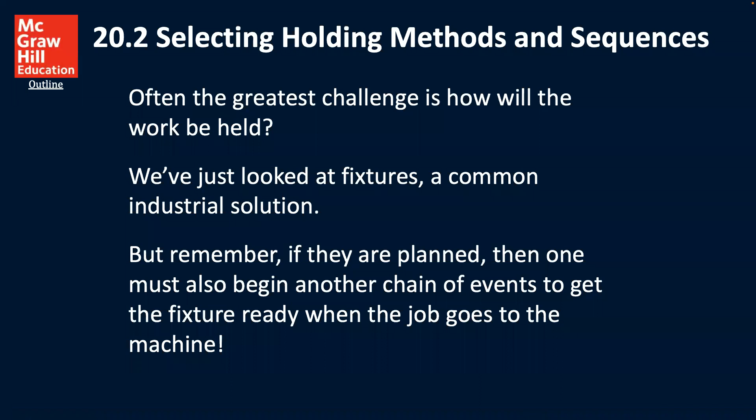Okay, continuing on, let's talk about selecting holding methods and sequences. Often the greatest challenge is how will the work be held? We just looked at fixtures, a common industrial solution, but remember, if they are planned, then one must also begin another chain of events to get the fixture ready when the job goes to the machine.

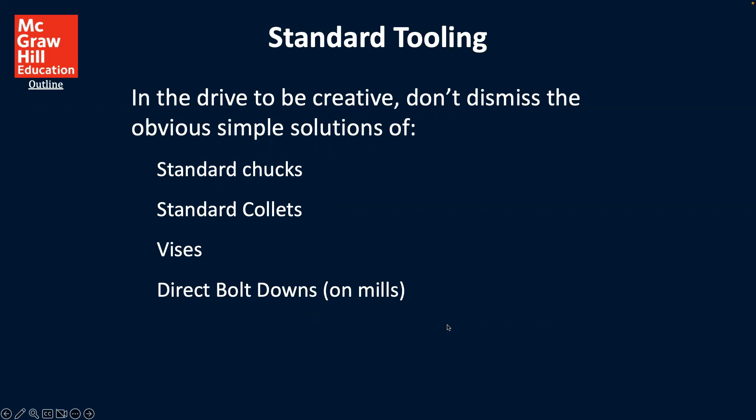So for standard tooling, in the drive to be creative, don't dismiss the obvious simple solutions of standard chucks, standard collets, vises, direct bolt downs on mills. These are all possible ways that you can be doing that.

So here's a key point, the setup time versus tooling cost. When deciding between standard tooling and custom made, consider how many times this job is anticipated to be run. Sometimes a few hundred dollars spent on a custom holding tool returns thousands in quick machine setup and quick part changing compared to using standard tools. Again, evidence of how critical planning can be to a company.

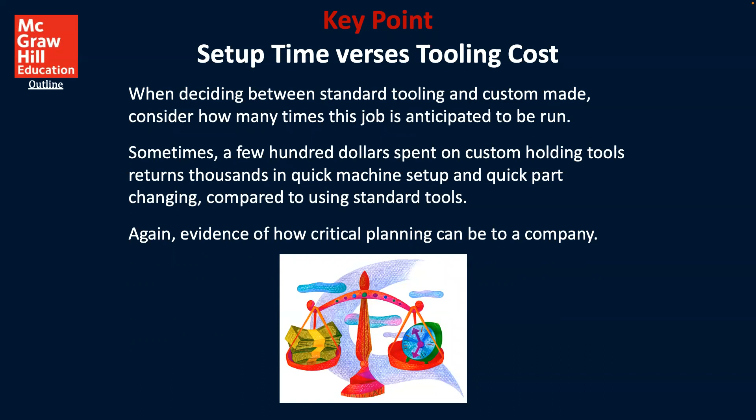So that's also part of the things that we're thinking about for you being an engineer. You're doing the planning and making sure that everything in the factory is working smoothly.

So for soft jaws made during the setup, another good solution are soft jaws, usually made by the setup person, both for lathe or mill work. In terms of a trade tip, don't miss the tip of using the part program to make the jaws. It's not a beginner method because it requires editing part program compensation to cut to the other side of the geometry line, along with changing or hiding other program details, but it does work.

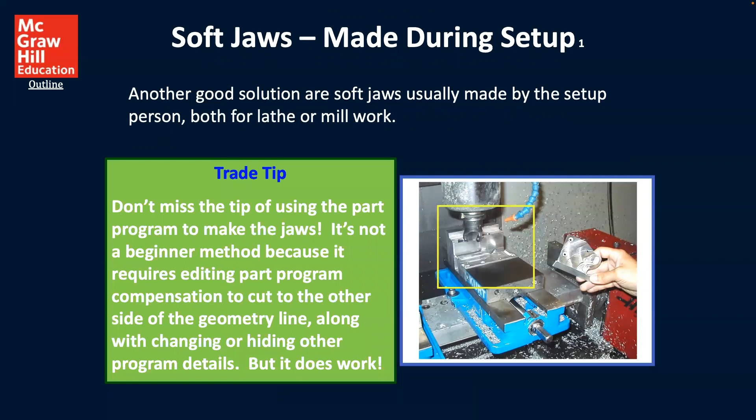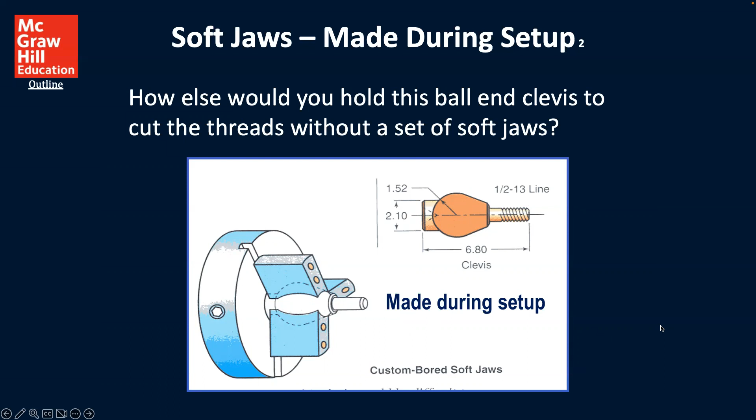So continuing on, how else would you hold this ball end clevis to cut the threads without a set of soft jaws? So this is what we want to be thinking about. And so the figure gives us some thoughts about that. Having a custom-bored soft jaws is what we're trying to think about, and this is something that could be made during setup.

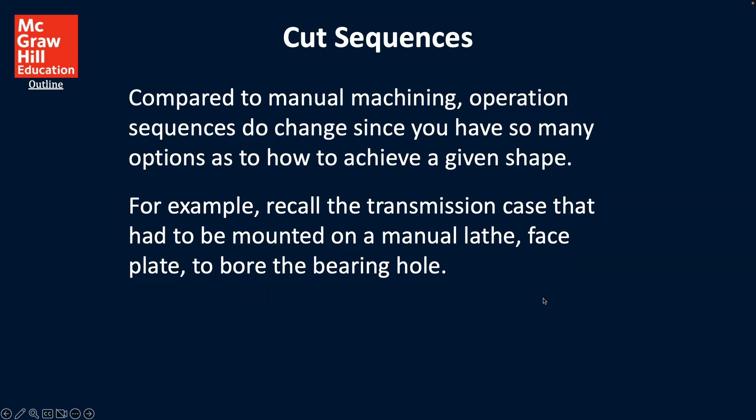So for cut sequences, compared to manual machining, operation sequences do change since you have so many options as to how to achieve a given shape. For example, recall the transmission case that had to be mounted on a manual lathe faceplate to bore the bearing hole. Now we want to be thinking of how we would add a circular interpolation.

Now it doesn't need to be bored. Employing a CNC, it can be circular milled. The operator can control the bore size to very close tolerances using tool radius offsets, much faster than trying to adjust a boring head.

So for a trade tip to control bore size, the end mill needs to be assigned its own radius offset in the program, and that should be spelled out in the setup document.

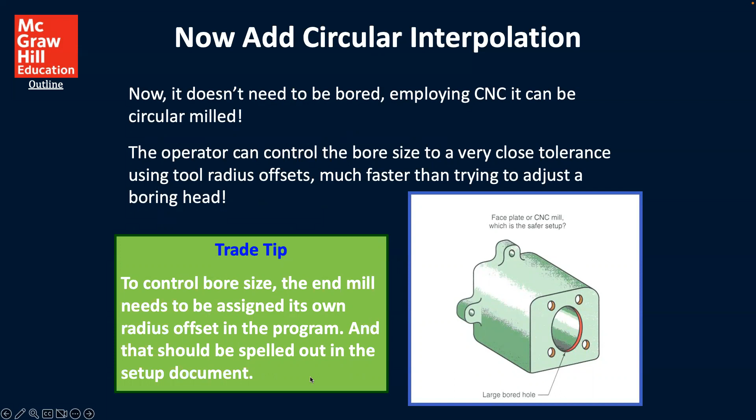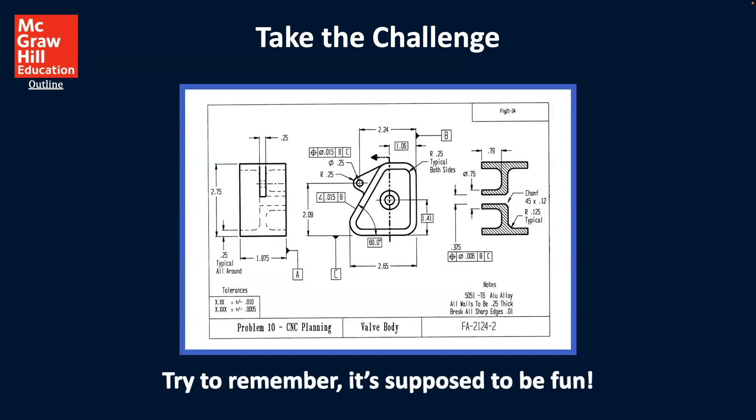So take the challenge. Try to remember it's supposed to be fun. And so that's ultimately what we're thinking about as we're finishing up this module. So for a conclusion, take the challenge as you evaluate your program planning for the valve body. Recall that no plan is perfect, nor is it ever quite finished.

Let's see yours. Work together and try not to look at the two solutions until you are positive your team has the best yet, and I have no doubt many will do great. So we're going to be working as individuals, but this might be something interesting for you to be thinking through and work through those suggested exercises that they're talking about.

Okay, that's going to end for this module, and now we're going to get into specifically starting to do some CNC programming.